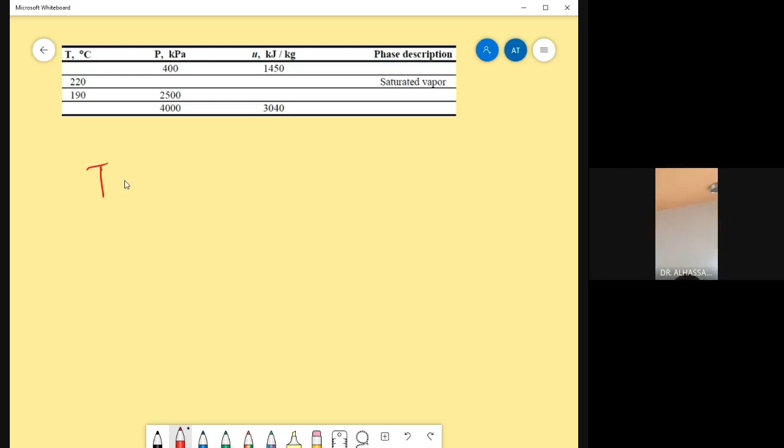Here we are given temperature equals to 190 degrees Celsius. I hope you have your property tables with you. And then we are given pressure also equals to 2,500 kilopascal. Now we are interested in determining the internal energy and then the state of the fluid.

There are two options by which we can approach this question. One option is that in order to determine the state of the fluid, we can find the saturation temperature using the TV diagram, like this.

So finding T saturation at 2,500 kilopascal, or 2.5 MPa. So we will have to look for T saturation. What is the T saturation here? How much is this? Ayman, can you help us? 223.95 degrees.

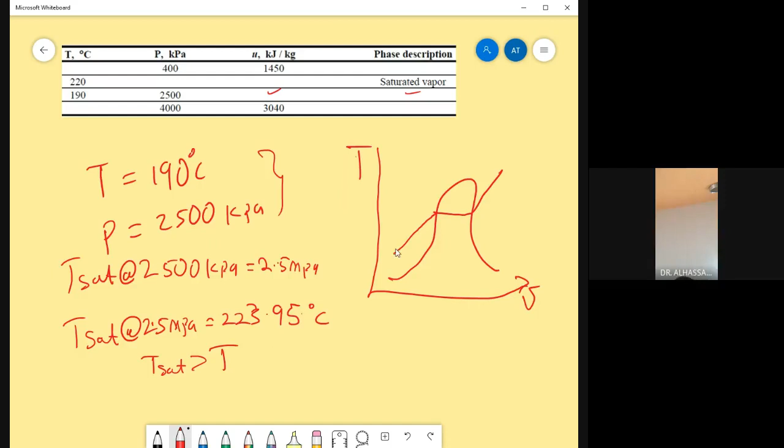So we discovered that the saturation temperature is greater than the temperature T. So it means that our fluid is going to be in this state. So this is our T saturation, and our temperature T is given over here. This clearly shows that the state of our fluid is compressed liquid state.

So now we have to go to the compressed liquid state at pressure of 2.5 megapascal and temperature of 190 degrees Celsius. We need to find the, yes, so let's conclude over here. Since T saturation is greater than T, this implies compressed liquid state.

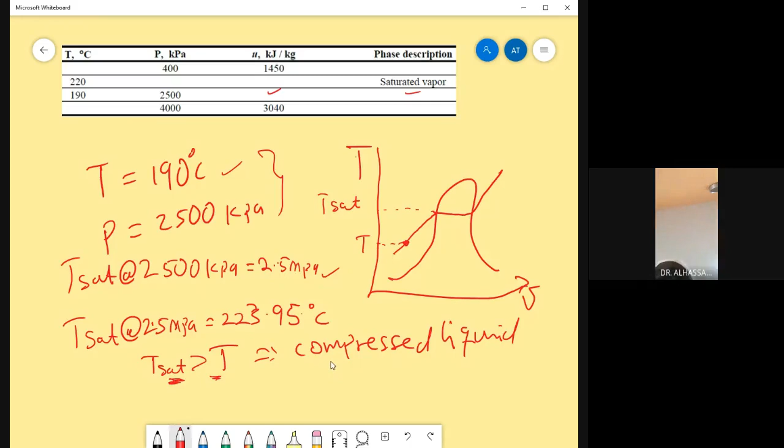Now we have to go to the compressed liquid state, but if you have difficulties doing this, Ayman, we will need interpolation over here, right? Is it? Hello? Yes, but the compressed liquid table does not have 2.5 megapascal.

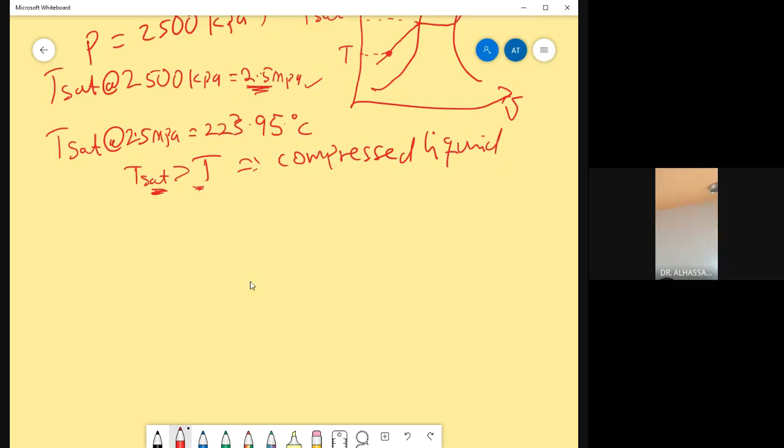So I do not have my property table with me here. Because in the compressed liquid state we do not have 2.5 megapascal, we are going to make an assumption that the fluid is no longer at the compressed liquid state. We assume it to be in the saturated liquid state. So at that particular point, we are going to look for UF.

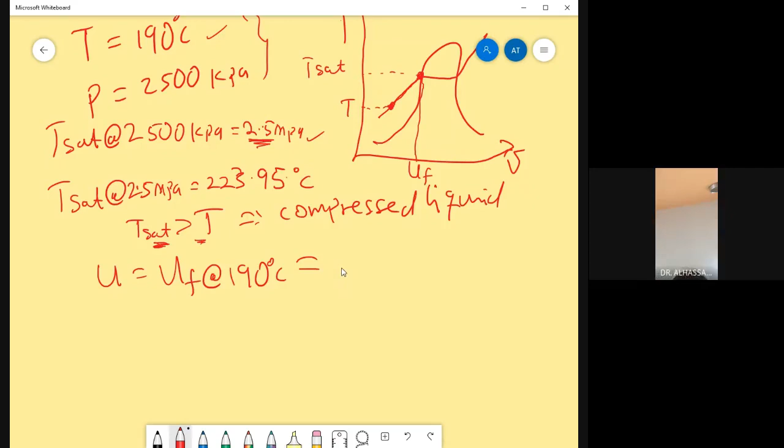So our U is going to be equal to UF at the given temperature, not the pressure, which is 190 degrees Celsius. What is the UF over here? Can you tell me what is it? 806.00, so kilojoules per kilogram.

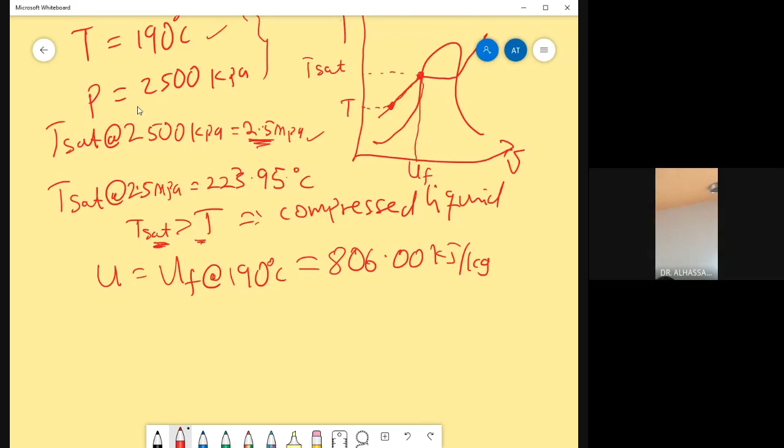Okay, another way by which you can approach this question is like this. Somebody can decide to say, I'm going to determine P saturation. I'll first of all find P saturation at 190 degrees Celsius. How much is this? Can somebody tell us, what is P saturation? 1255.2 kilopascal.

So kilopascal. Now, looking at the PV diagram, we have a situation like this. This is our constant temperature line. So the saturation pressure is this P saturation, but the pressure of our fluid is 2,500, which will be somewhere here. So again, it means the state of the fluid is in the compressed liquid state, because P is greater than P saturation at 190 degrees Celsius.

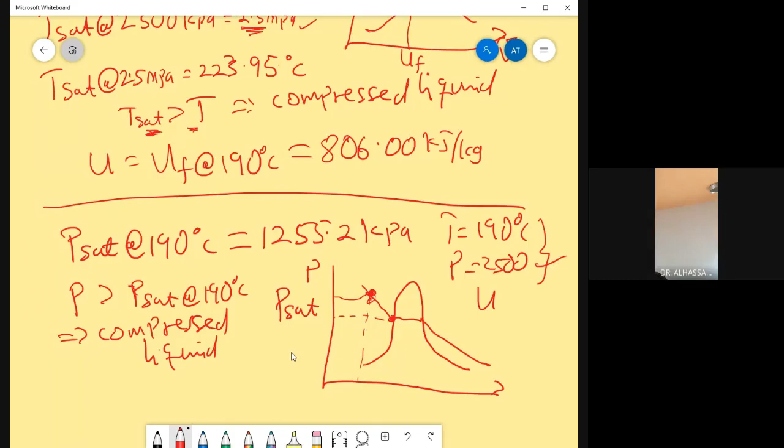But like I have told you, don't do the approximation with respect to pressure, otherwise the difference is going to be too much and there will be error. Instead, I'll advise you to rely on the TV diagram, where the approximation is like this, instead of this. So we are going to assume that the fluid is in this state.

So nobody will arrest you.

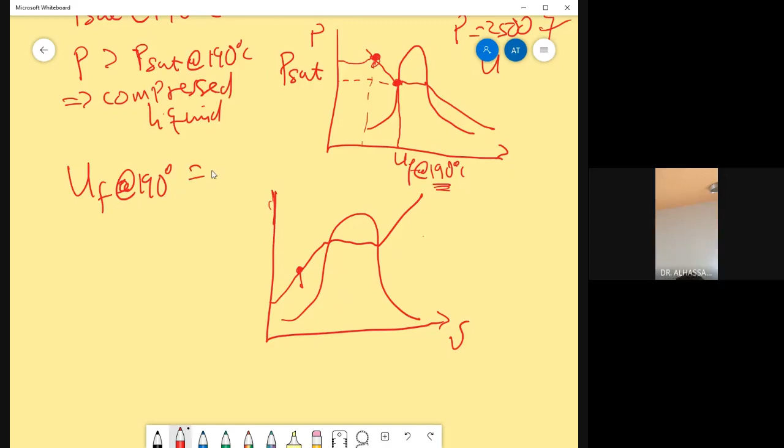Again, you find the UF over here, but at the given temperature, not pressure. At the given temperature means at 190 degrees Celsius, you are going to find this UF. So you have UF equals to, at 190 degrees Celsius, equals to the value that we have above. So whichever way you go about it, then you get 806.00. So this gives us 806.00.

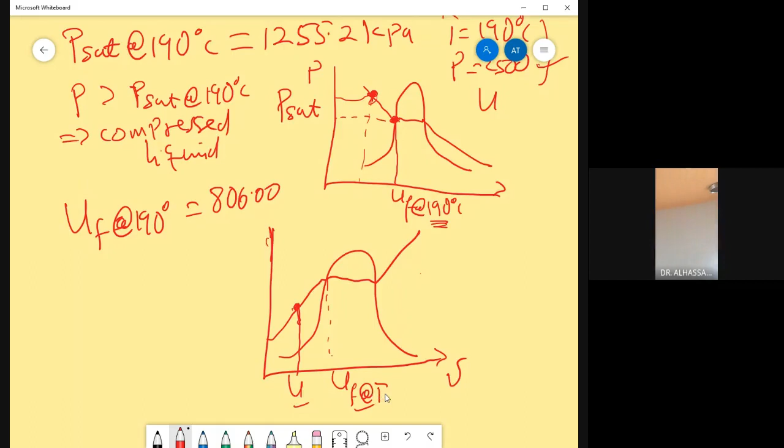Okay, so you will discover that, please pay attention. If actually there exists the value of U in this region, and then if you compare it with UF over here at the given temperature, you will discover that the difference between this U and this UF is not going to be very big. But here, we unfortunately cannot determine the value of U in the compressed liquid state. So we make the assumption that the fluid is in the saturated liquid state. So whichever way, if in actual fact there exists the value of U at this state, and then you find UF, the difference is not going to be so big.

But if you find UF, let's say at a given pressure, let's say 2,500, and then you determine the value of U over here to be in this region, if you compare these two, maybe the difference is going to be about 100. But if you compare this U and then this UF at the given temperature, the difference could be about 2 or even 1. So don't make that mistake by finding the UF at the given pressure. The UF is always obtained at the given temperature. Okay, so I hope this answers the question, the one who asked me, who reminded me.

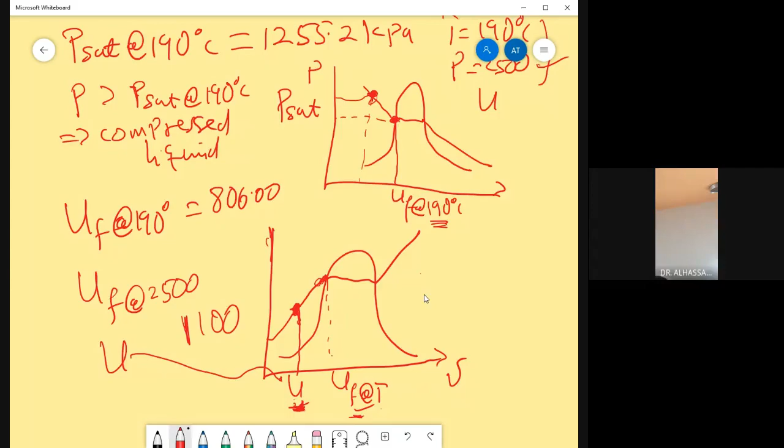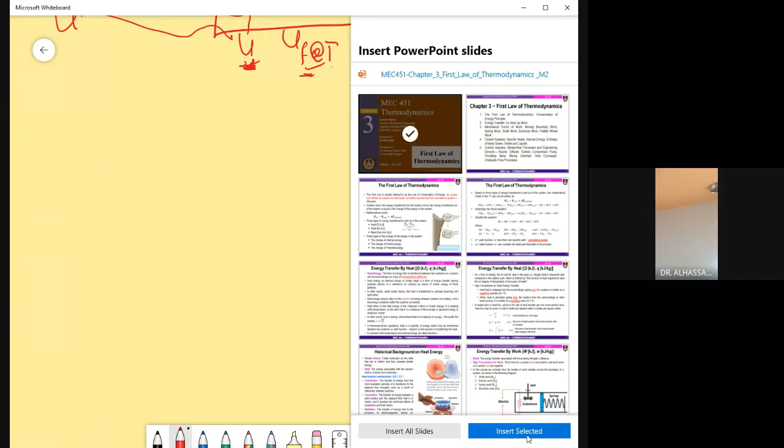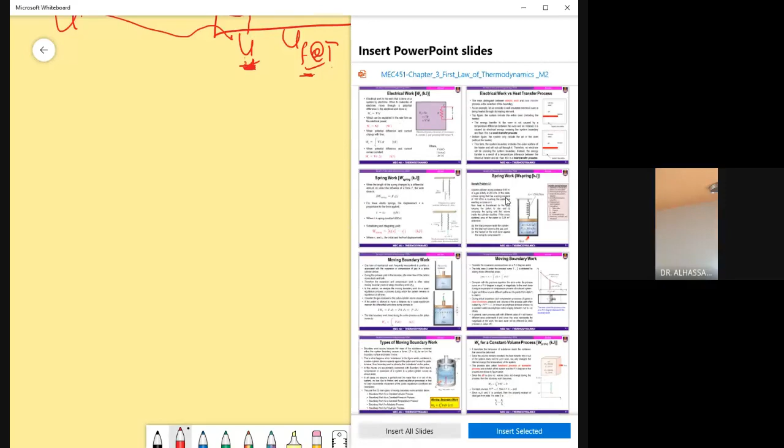Okay, so let us move on to a very important question. Okay, so before we start the lecture for today, let's see over here, PowerPoint. Yes, so we have already started with chapter 3, and I would like to discuss this particular question in chapter 3. Yes, this particular question.

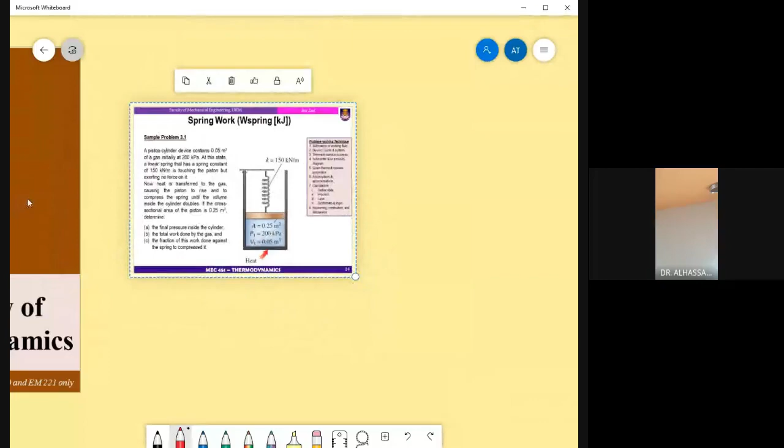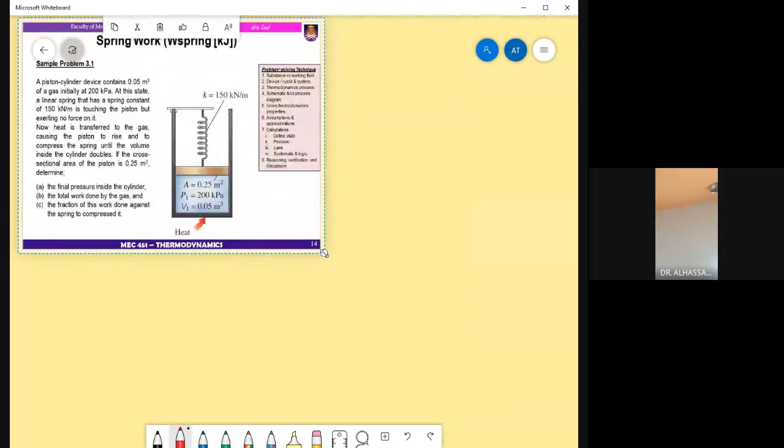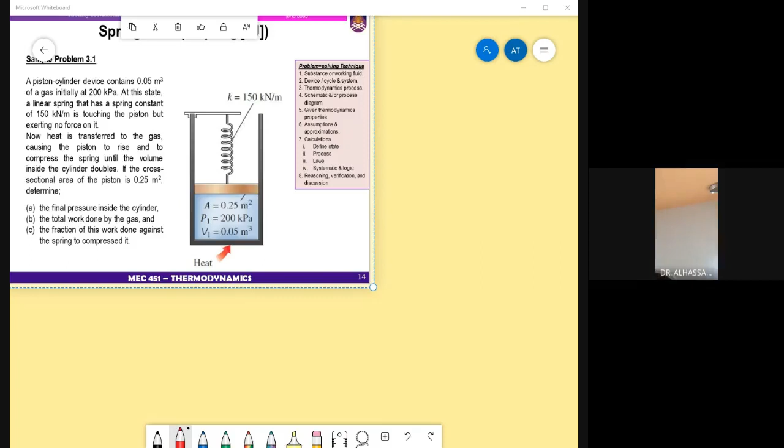So can you see the question clearly? Okay, so now in this particular question, we are told that, yes, again, for the sake of those who were not present last time, let me introduce you to what we did last time. We looked at the first law of thermodynamics and its application to closed systems. We did look at heat transfer, work transfer, and mass transfer. We also considered the application of the first law in a cylinder, piston cylinder arrangement. We considered different forms of work, electrical work transfer. We considered also shaft work and all these things.

So this particular question will give us an idea about the application of the first law of thermodynamics in regards to closed systems. So in this question we are told, pay attention, a piston cylinder device initially contains 200 kilopascal of a gas. Let me sketch it carefully over here. We have a cylinder. Initial state of the cylinder is like this, and then we have a piston. So the piston has a spring over here which is suspended. Now the pressure is given, P1 equals to 200 kilopascal.

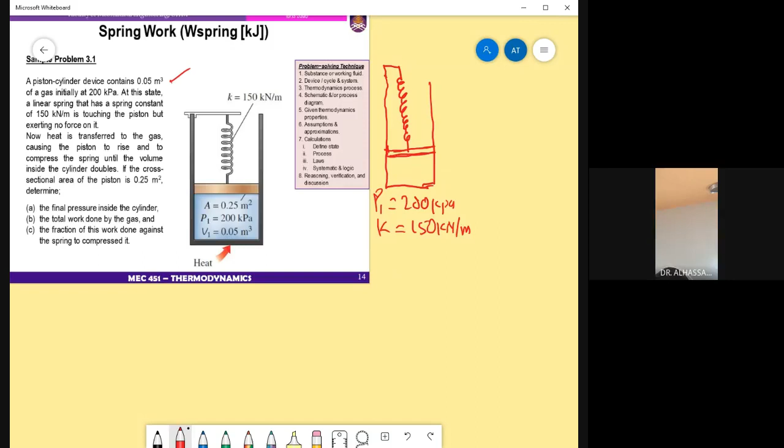And at this state, a linear spring that has a spring constant of 150 kilonewton. So K, the spring constant, is 150 kilonewton per meter. It's touching the piston, but not exerting any force on it. So it's just like this, that we have a piston cylinder, and then here we have a gas. So the gas is exerting some pressure on the surface of the piston. So it is like this, that the piston is resting on top of this gas, and the spring is just touching it. However, the spring is not exerting any force on the piston. So it's just touching it. It means it is loose. There is no tension inside the spring.

So now heat is transferred to the gas, causing the piston to rise. So now you see that whenever you transfer heat, let's say Q, into the piston, what happens to it? So temperature is going to increase. Pressure will be building up. Okay, so now what we are told is that it causes the piston to rise and to compress the spring until the volume inside the cylinder becomes double. So now we have state 1 over here. Since the parameters of the piston is changing, initial volume V1 equals to 0.05 meters cubed. So the moment you transfer heat to it, and if any of the properties of the fluid changes, then the system will move to a new location called state 2. And at this state 2, we'll have a situation like this.

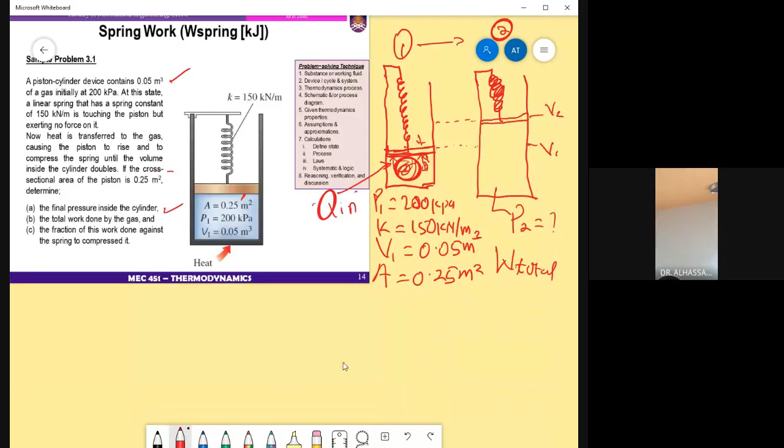One information is that, so let me draw the diagram, the PV diagram in relation to the history of this particular question. I'll draw the PV diagram just to give you a clear idea of what is happening. We have the PV diagram over here.

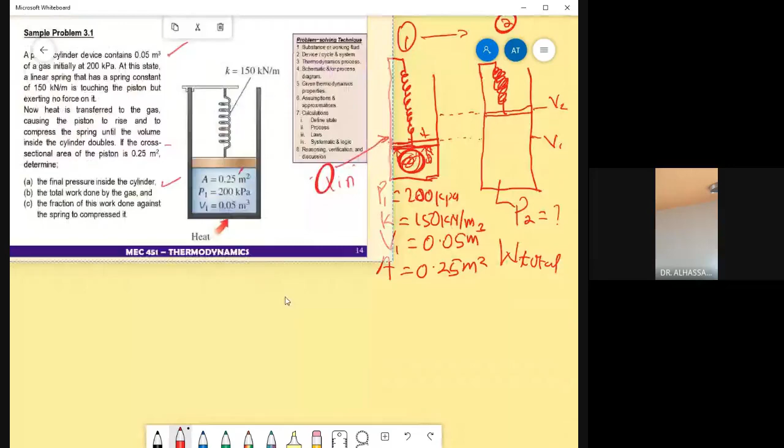So we have, let's say, the PV diagram over here. The initial volume of the fluid, let's say initial volume is V1 equals to 0.05 meters cubed. And then initial pressure, P1, is given by P1 over here.

Now, as we transfer heat, so heat Q is transferred to the piston. What happens is that it is going to push this piston upwards. Okay? So if there is no spring attached to the piston, it would have expanded, or let's say moved upwards freely.

It could have been a constant pressure process. So volume would have increased, pressure would have been constant. So we could have a situation like this, in which the final volume is going to be here. We'll have our V2 over here, which we don't know.

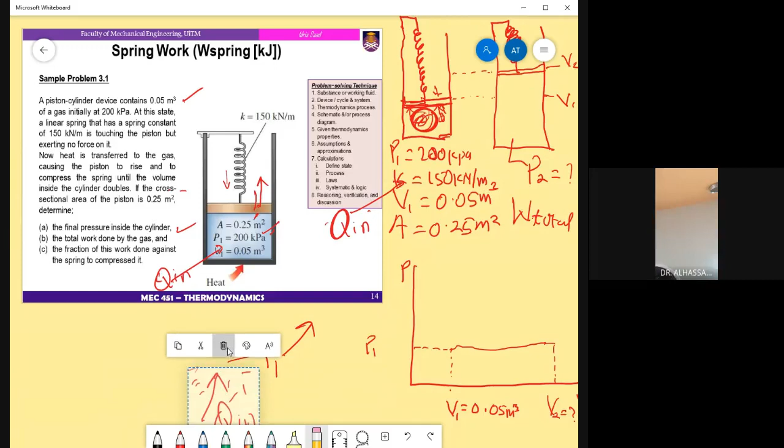So it means we're going to have increase in volume, and pressure is going to increase as well.

So we have a situation like this until finally we come to this final pressure. So this is going to be the diagram, the PV diagram for this particular question. If it were a constant pressure process, the work done would be bounded only by this area. But because of the presence of this spring, there will be an increase in pressure and increase in volume as well, so the line will be moving in this direction.

And now we need to find the final pressure, the pressure over here. But we know the initial pressure is P1 equals to 200 kilopascals. Now, coming back again to the piston, let's see.

To find the final pressure, first let us find the displacement of the piston. So the piston will be displaced through a certain distance. So let us draw: initial piston is this, and then the final one is this.

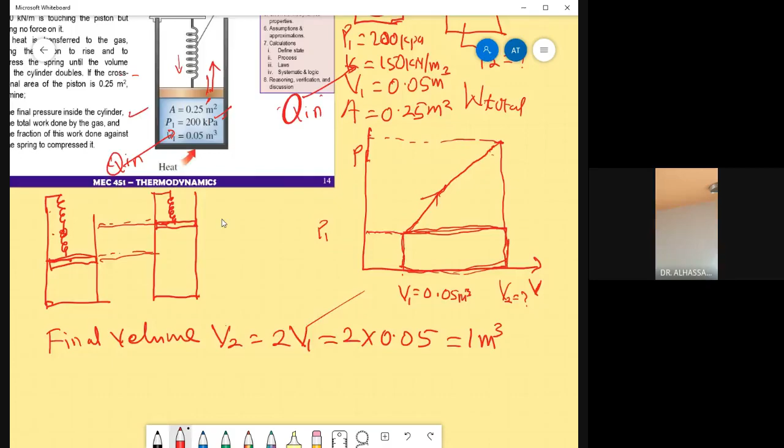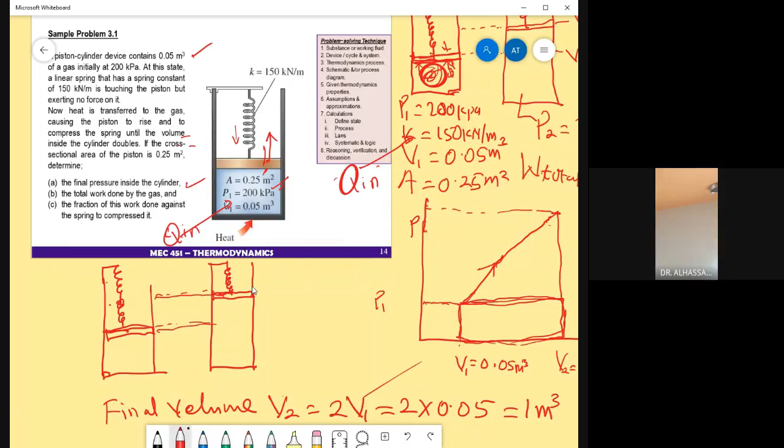So if you look through the question again, at this stage heat is transferred to the gas, causing the piston to rise, and then compress the spring until the volume inside the cylinder doubles. So it means the final volume equals to 2 times the initial volume.

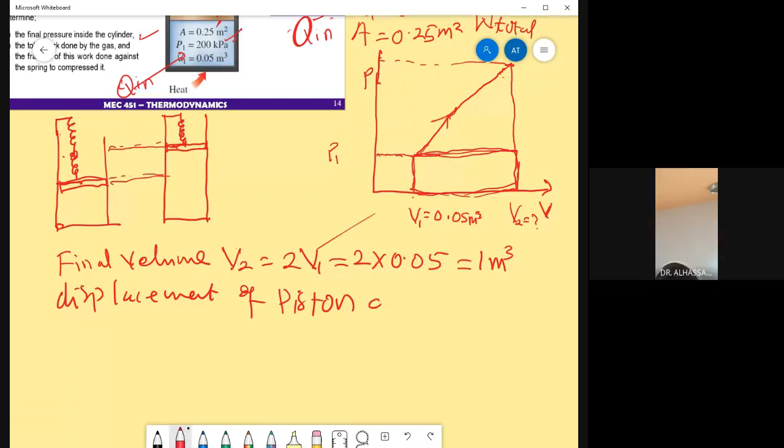So now the displacement of piston, both piston and spring, is given by, so let's say initial volume is V1, final volume is V2. When the piston is moving upwards, it travels through a certain distance, let's say this distance is given by X. So this distance is the same as the change in volume, V2 minus V1. So delta V equals to V2 minus V1, which equals to X.

So how do we determine this delta V? If I know this length X, and if I know the surface area of this piston, which is A, then area times the height is going to give us the volume - the volume of this displacement region, that's what we are interested in. So it means our change in volume, delta V, equals to X times the area.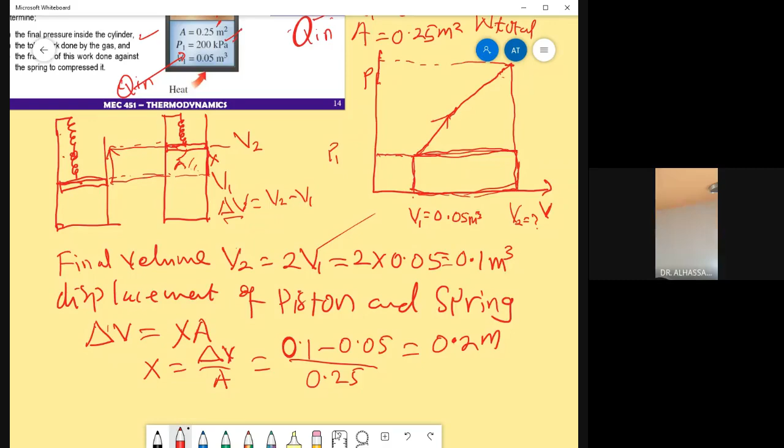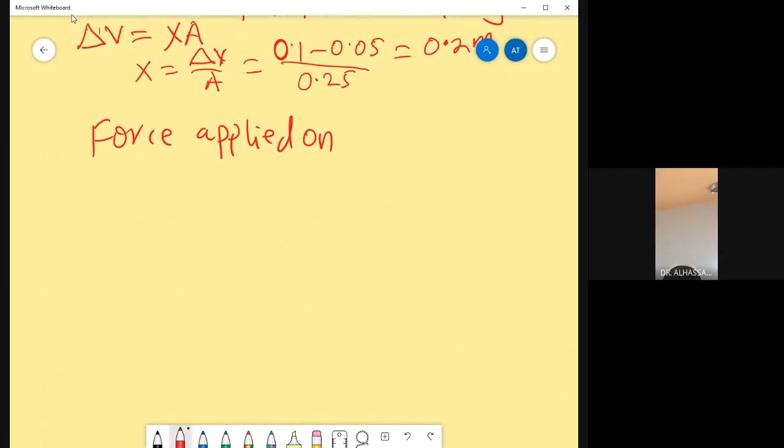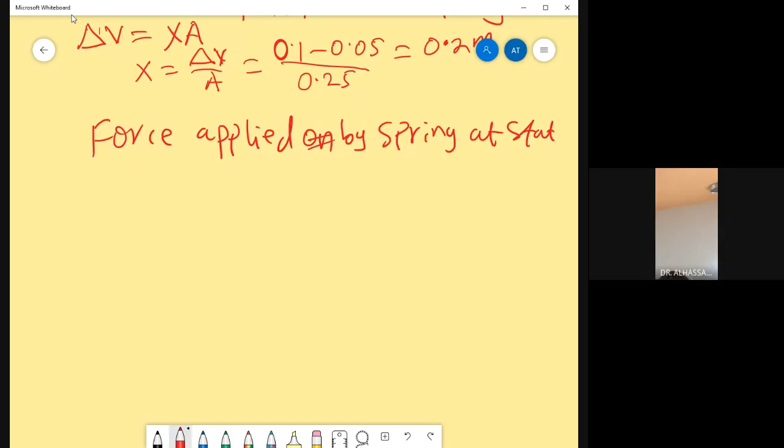So now we need to find the pressure applied on the piston, which means we need to find a force - force applied by spring at state 2. This is given by F equals to K, the spring constant, times the displacement. Here the spring constant is 150, so this gives me 150 kilonewton per meter times X.

So let me see over here, we have X equals 0.2 meters. So this finally gives us 30 kilonewton. So now this is the force exerted by the spring at state 2.

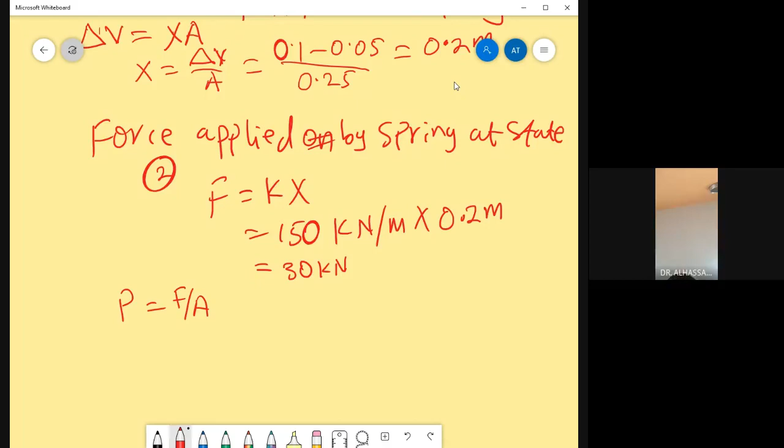So now if you want to find the pressure, what is the definition for pressure? Pressure is force per unit area. So this gives me 30 kilonewton divided by the area, which is 0.25 meters square, this equals to 120 kilopascal.

So 1 minute... okay... wait... okay, so let's proceed.

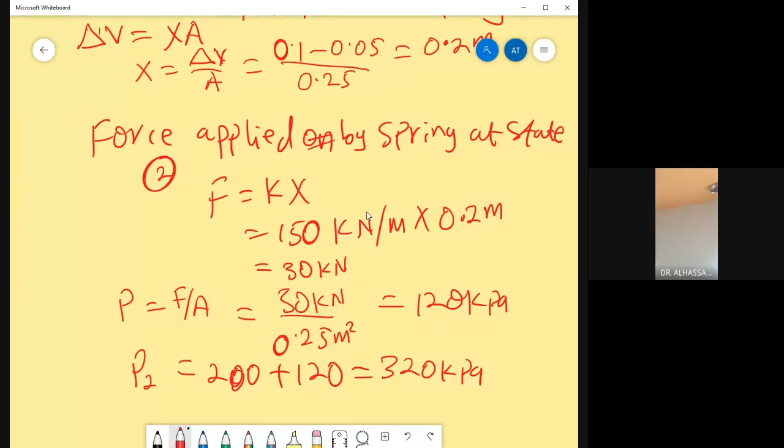Initially, the initial pressure over here is 200 kilopascal. But as the piston is forced to move up, slowly there will be some pressure building up within the piston. As a result, the pressure which is exerted on the piston to raise it up corresponds to 120 kilopascal. So we're going to top up that pressure with this one to get 320 kilopascal. So it means the final pressure P2 equals to 320 kilopascal.

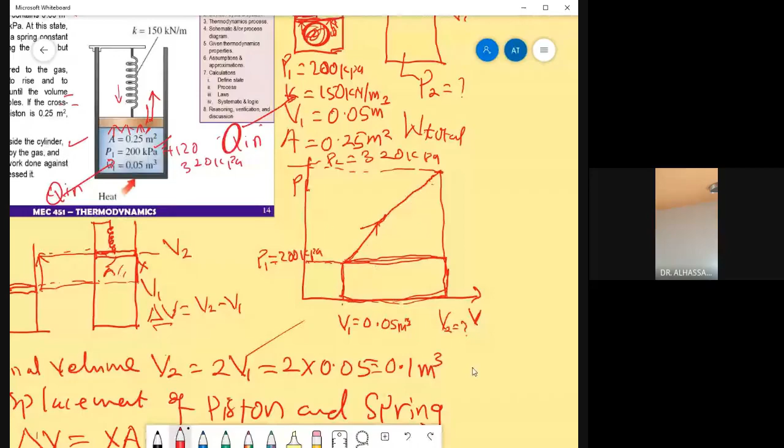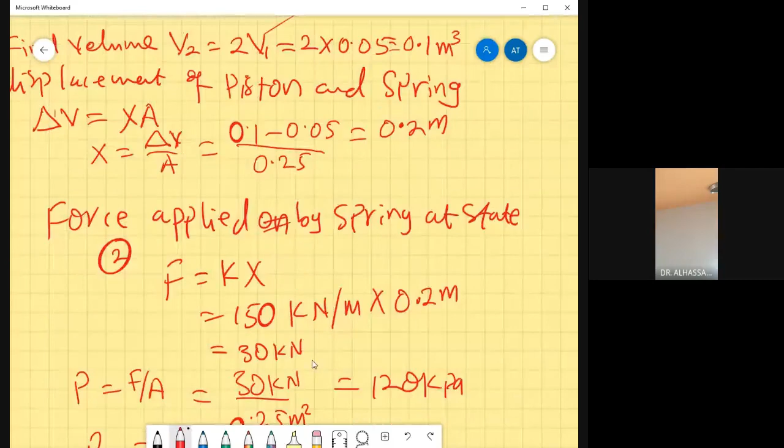Now let's see. We have to determine the final pressure which the question asks us to determine. Now let us find the total work done, I'll draw the PV diagram. Total work done is given by the area under the curve. So the initial situation is like this.

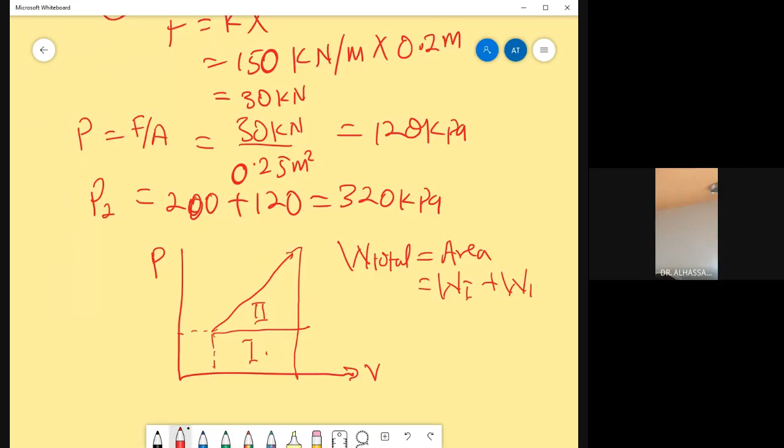So we have curve number 1 is this, curve number 2 is that. This is the PV diagram. So total work done, W total, equals to the area under the curve, which means equals to the area A1 plus A2. In other words, instead of using area, I'll say W1 plus W2. So now let us determine W1.

W1 is nothing but the area under this curve, which is given by V1 and V2 times this distance. So we know P1 equals to 200 kilopascal. This gives me V2 minus V1 times pressure P1. So then that gives me V2 is given by 0.2.

Sorry, 0.1. So we'll have, bringing the pressure first, 200 kilopascal times 0.1 minus 0.5... sorry, it should be 0.05. So 0.05 this way. If you calculate this carefully, you're going to get 10 kilojoules. And then we will determine the area under this curve.

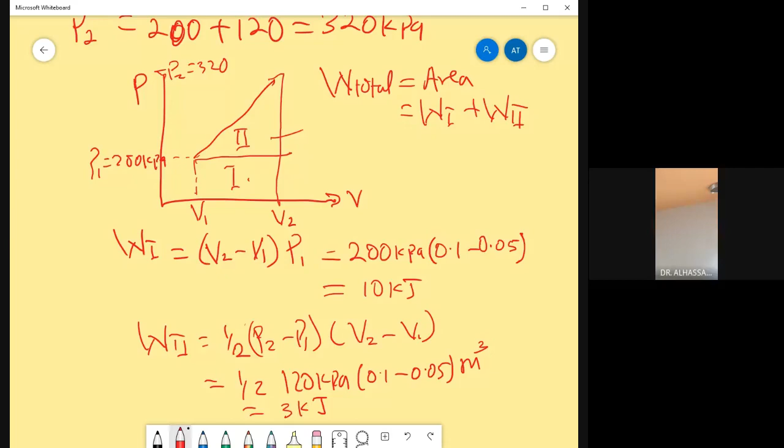So the area, this is a triangle. Area of a triangle is half times the height, times the width. So in other words, I'll get half times the vertical distance, this distance. You know the pressure over here, P2 equals to 320 kilopascal. So this gives me vertical distance is given by P2 minus P1 times horizontal distance, V2 minus V1. So this gives half times 120 kilopascal times 0.1 minus 0.05. So eventually, this is meter cube, this gives 3 kilojoules.

So now the total work done in pushing the piston upwards, W total equals to 10 plus 3, which equals to 13 kilojoules. Okay, so that is it for the first part of the question. If we go down, the final pressure we have already done, then the total work done by the gas.

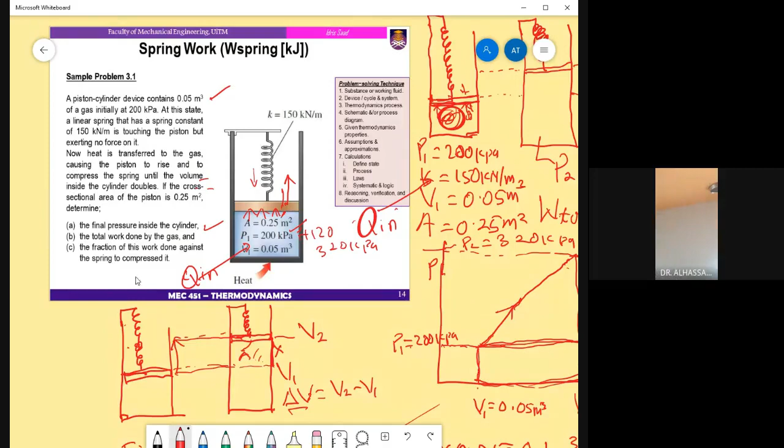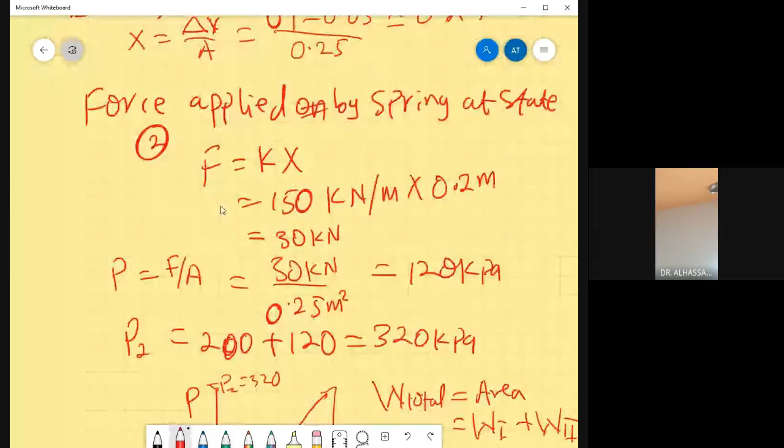Now we want to determine the fraction of this work done against the spring to compress it. So it is the same, that is the 3 kilojoules. The work done necessary to push the piston up to its final state is equivalent to the work done by the piston in moving from state 1 up to state 2. So the final part, the work done for part C, is given by 3 kilojoules.

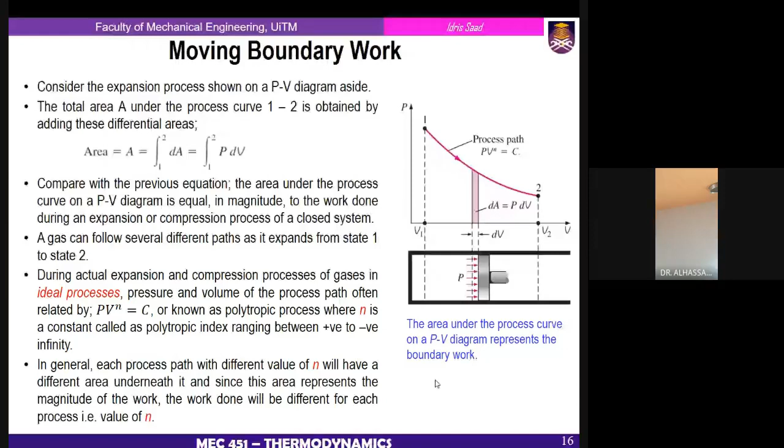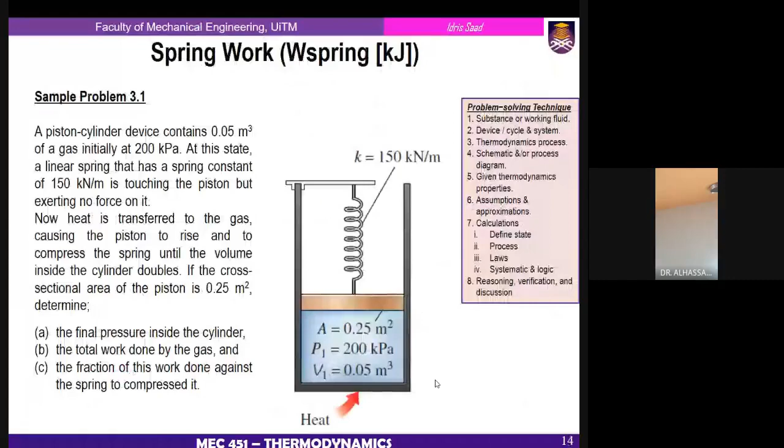Okay, so here, I think last time we stopped somewhere here, moving boundary. Yes, we discussed this already. Let me see. Yes, I think this is where we stopped, right? Type of moving boundary work. So let's continue with type of moving boundary work.

So there are various types of moving boundary work. We have boundary work for constant volume process, boundary work for constant pressure process, boundary work for constant temperature process, and boundary work for adiabatic process and polytropic process. The word boundary, when we say boundary work, it is the work associated with a moving surface. So if you take the piston, it moves to and fro inside the cylinder, and this is what we refer to as moving boundary. And because of this movement, different thermodynamic processes exist, and because of this, we will have different boundary work.

So first, we will look at constant volume process, or boundary work for a constant volume process. Now, one fundamental thing we need to know is, you see, sorry.

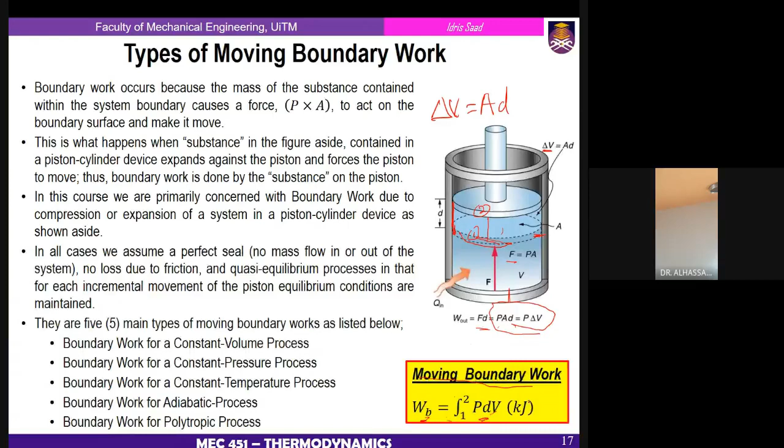WB is the boundary work, and integrating: if we assume the piston moves from an initial volume V1 up to a final volume V2, we can integrate over the whole volume to find the total work done, which is given by this. So PdV is the boundary work, and the unit is in kilojoules.

Now, if you want to determine the boundary work for a constant volume process, we start from the basic fundamental equation. So we have a constant volume system, meaning the volume does not increase, it remains the same. So the initial volume and final volume implies V1 is the same as V2.

So by definition, the fundamental equation for the boundary work is the integral from 1 to 2 of P dV, which we can express as P times the bracket V2 minus V1. So in this situation, if V1 equals V2, it implies the boundary work for a constant volume process equals 0. So the WB here will consequently equal 0 because V1 and V2 are the same. So that is it for boundary work.

Now, a process that undergoes a constant volume process is called an isochoric process, or sometimes isometric. This is very important: isochoric process, adiabatic process, isothermal process, isentropic process. One after the other, we will look into them. So isochoric process is a constant volume process.

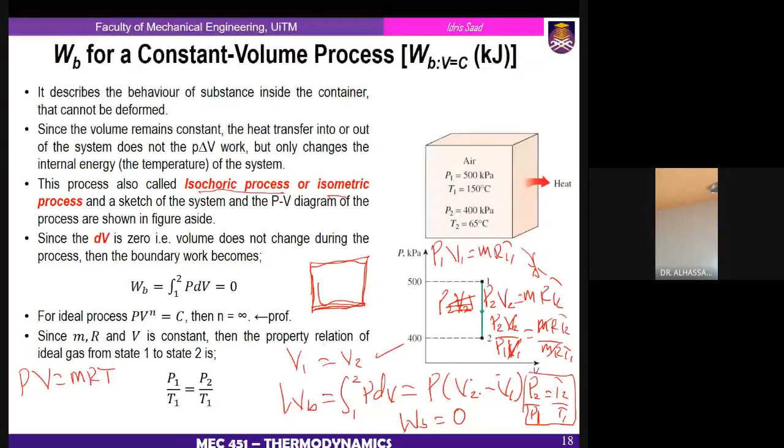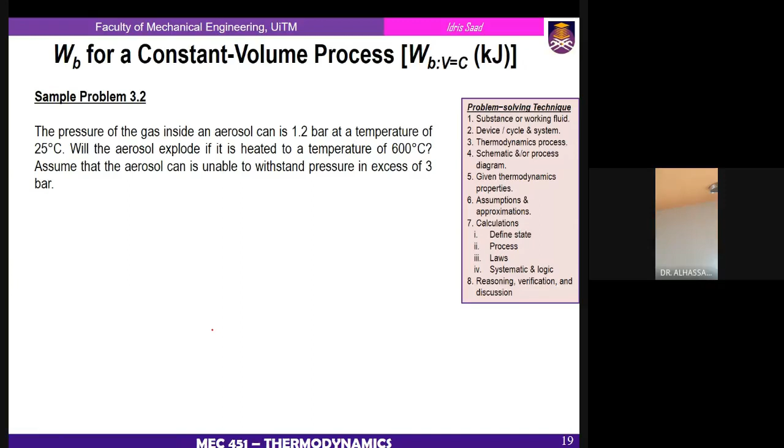Now, if we want to solve this question - I'm thinking of completing everything before we start the tutorials, so later on. Okay, let's go one by one.

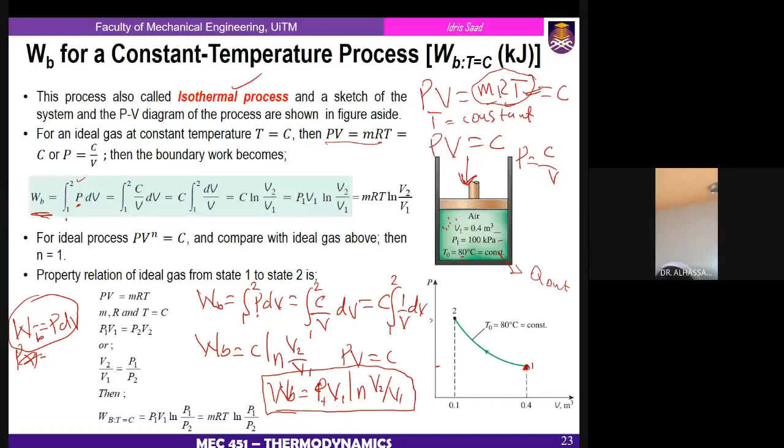So whenever you want to determine the work done for an isothermal process, if you use W boundary equals to P dV only, then it is 0. So this is valid only for isochoric process. But for isothermal process, the valid equation to determine the boundary work is P1V1 or P2V2 times log of V2 divided by V1.

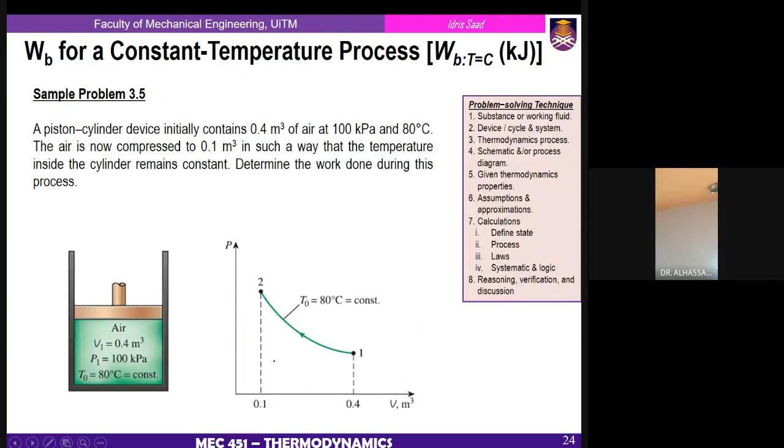So now, from ideal gas law, we have PV equals to MRT. If MR and T are constant, it means P1V1 equals to P2V2. So eventually we can have this situation, and the boundary work can be expressed in terms of P1V1. And because we know that V2 over V1 equals to P1 divided by P2, we can make a simple substitution in this way.

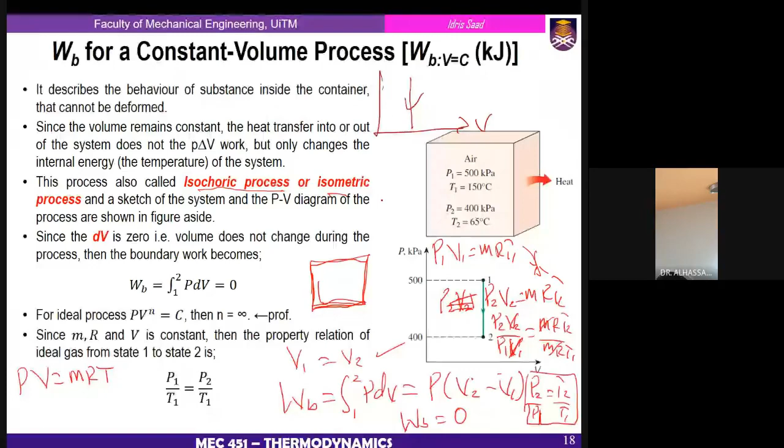Now we want to determine the boundary work for adiabatic. One more thing, you have to be very careful: all the time you should try to recognize the graphs that come along with these processes. For a constant volume process, this is the graph, this is the situation, because V1 and V2 are the same. Whereas for a constant pressure process, the nature of the graph is like this.

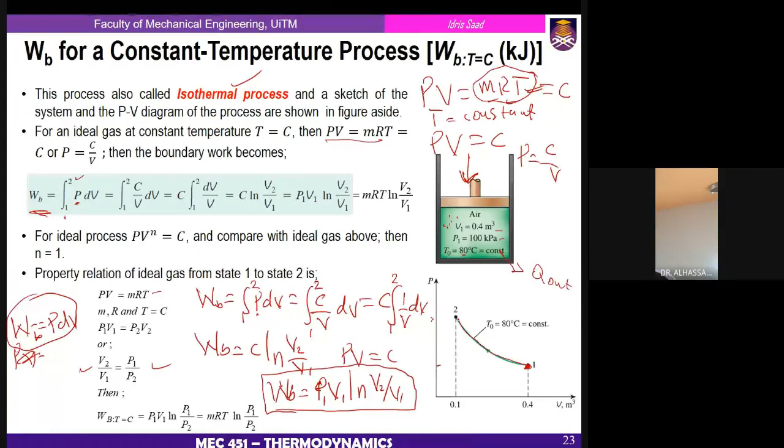And again, for a constant temperature process, the nature of the graph is like this, the pressure increases in this way. Then we have the constant adiabatic case. What is adiabatic? Adiabatic is a situation where there is no heat transfer into or out of a thermodynamic system. You can imagine a highly insulated thermodynamic system, like a thermoflask for example. These are adiabatic systems or an adiabatic process.

So now let us develop the equation, the boundary work for an adiabatic process. We know that the basic definition for boundary work is given by this integral from V1 up to V2 of P dV.

So now, for all adiabatic processes, yes, all adiabatic processes are isentropic processes. You understand? All adiabatic processes are isentropic processes because we have noted that the change in entropy...

Let me divert a little bit. The change in entropy of an ideal gas always equals the integral of dq over the absolute temperature of the system. So this is the amount of heat added to the system, and this is the absolute temperature. This delta S is the change in entropy. And for adiabatic process...

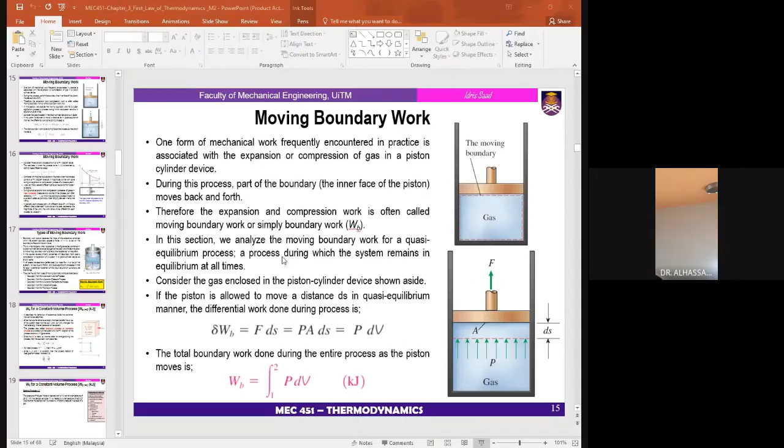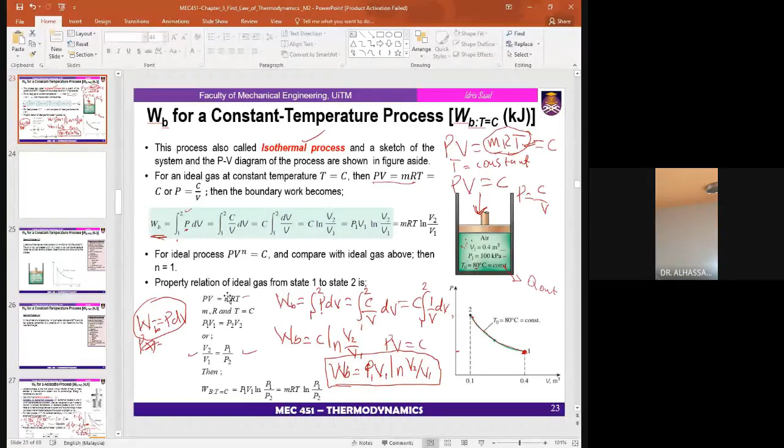Let me open a different page so it becomes clear to you. Keep source, let me open a different page. Yes, this is much better. So we have the situation like this. Oh, sorry.

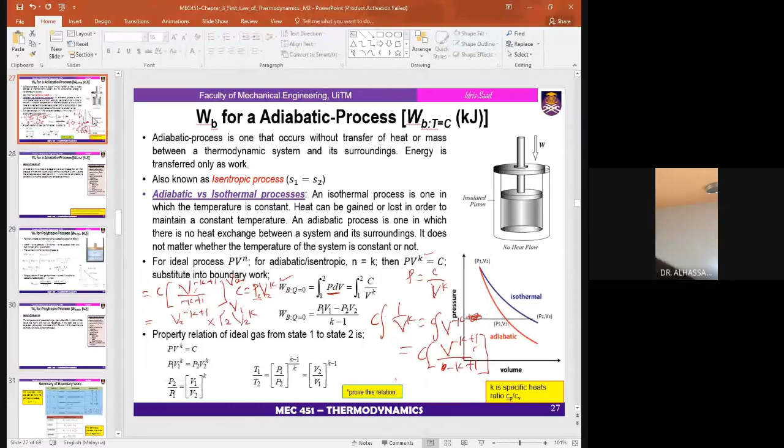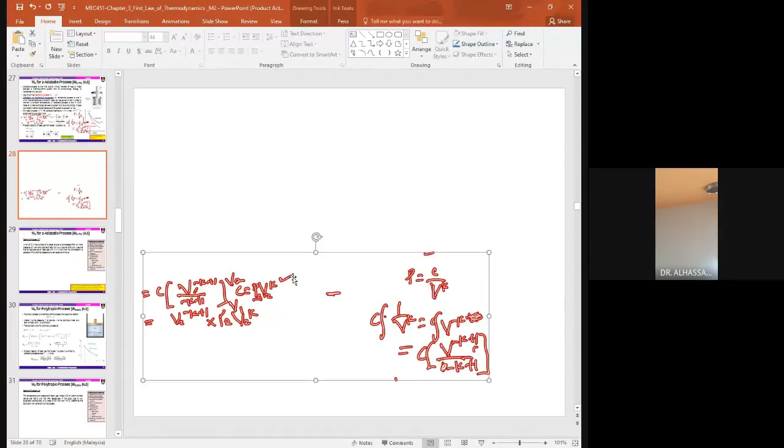Yes, so like this. Our final boundary work was like this. So we have W boundary work equals to C into bracket V minus K plus 1 divided by minus K plus 1, running from V1 up to V2.

Now what I'm saying is that if I push this, I want to put the limit of integration inside. If I put V2 inside, then I'm going to replace P2, V2 raised to the power K equals to C into, I'll replace it by this C. You understand?

Okay, so then I'll have, let me see, or alternatively we can take it this way. So now we have also P1, V1 raised to the power K, again equals to C. Now I'll put the limit of integration into it, so I'll have a situation like this.

W boundary work equals to C into bracket. I'll have V2 minus K plus 1 divided by minus K plus 1, minus, again I'll have V1, minus K plus 1 divided by minus K plus 1, all right?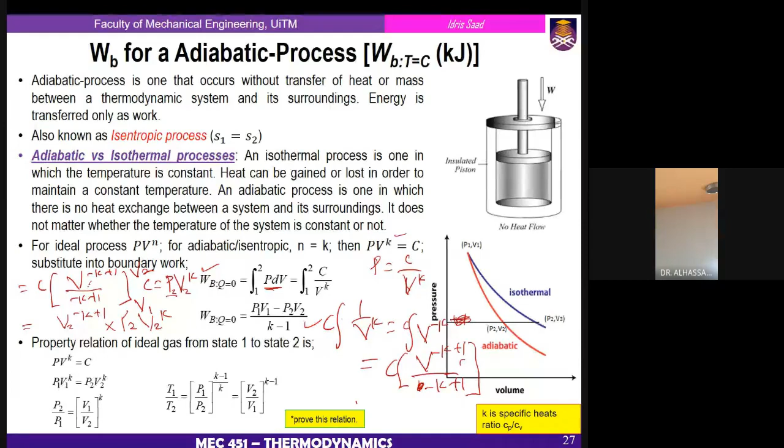Okay, so this is a very rich information that I'm giving you now, so please take note of it. Anytime you want to find a boundary work for an adiabatic or isentropic process, it is given by boundary work equals to P1 V1 minus P2 V2 divided by K minus 1. This is very important. Whereas for the isothermal case, it is P1 V1 log of V2 divided by V1.

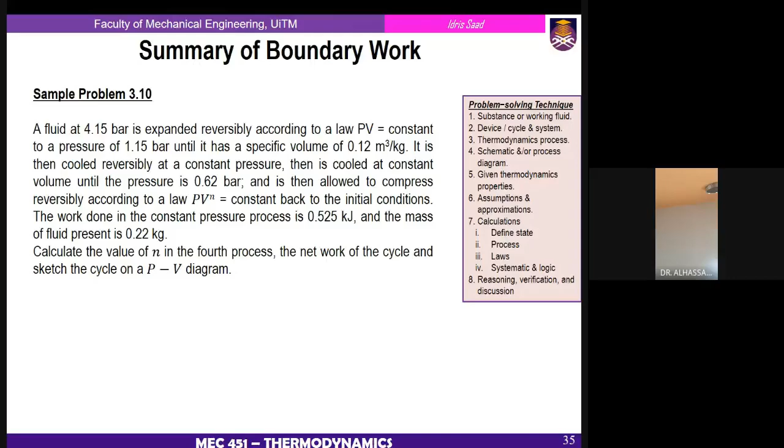Yes, so let me see. We will be stopping very soon, so this will be the last part. Next week we will look at some solutions, and then we will start with energy balance for closed systems. Let me complete this part for the boundary work.

Now, the boundary work for a polytropic process. So what's a polytropic process? A polytropic process is a process that obeys the law PV raised to the power n equals C. This is different from PV raised to the power k equals C, which is an adiabatic or isentropic process, where K is a different value. So for this particular situation, we have PV raised to the power n equals C, where n is the polytropic index.

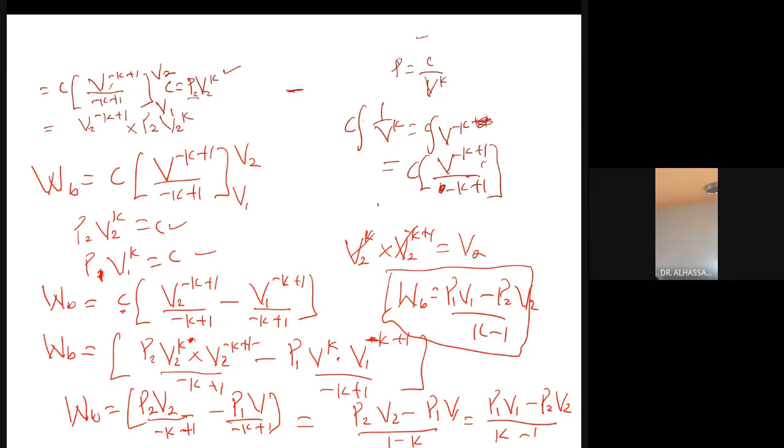You understand? So eventually, you see both equations are synonymous or similar in nature. The boundary work for polytropic and adiabatic are similar in nature. The only difference is that for a polytropic process we have N, and for adiabatic or isentropic process, it is replaced by K in this way.

Now, another way in which we can express this equation is in this form. We know PV equals MRT. So if P2V2 equals MRT2, and P1V1 equals MRT1, I can substitute in this equation, and then factorize MR out, so I have T2 minus T1, divided by 1 minus N. So for a polytropic situation, the equation could be this.

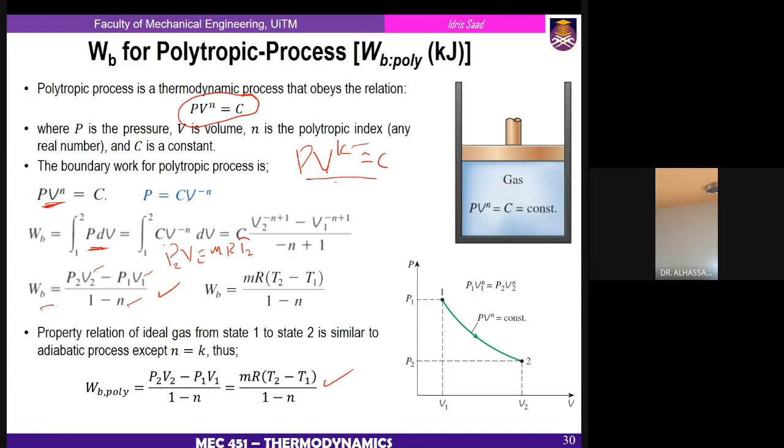Again, this is the nature of the graph for a polytropic process. You see this is undergoing an expansion process in this way. Let's see over here - this is the summary of the boundary work that we have considered so far.

So whenever you have a constant volume process, which is isochoric, it is governed by this ideal gas equation. Similarly, for isobaric process, the ideal gas equation is this. Isothermal process is this. All isentropic and polytropic processes are governed by P1 divided by P2 equals V2 divided by V1 equals T1 divided by T2, n divided by n minus 1. And with regards to the boundary work, isochoric process is this, this is isobaric, isothermal, and both polytropic and isentropic are also represented in this.

So for isentropic process, the value of n is equal to k. I've explained to you that adiabatic or isentropic process is governed by PV raised to the power k equals a constant. And a polytropic process is also governed by this equation. However, they have the same boundary work - the only thing is that depending on the situation, the n changes to k.